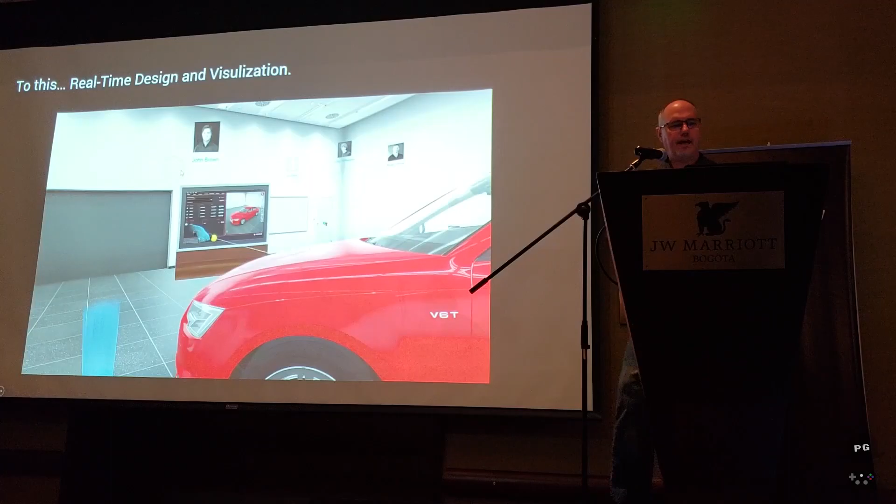I visited Audi in Germany a few months ago after Unite Berlin, and I saw this exact environment. There was a team of engineers actually designing the next generation of Audi vehicles like this. And this is what they see - you see the people here, and then you see their avatars. They're actually all in VR, making design decisions of these really cool cars.

This gentleman here is an engineer, an interior engineer. He's designing the interior. He wants to make sure that steering wheel feels right, that the seat feels right. I actually sat in that seat, and I was able to virtually grab the air conditioning ducts and see the particle stream, the way the particles of air would hit my face - is it high enough, is it low enough? You can make a lot of design decisions all in VR. It's really, really amazing what they're doing.

And this is what he sees. He's in the car, he feels like he's in the car. He's holding the real steering wheel, there's trackers on there, so it's all tracked. It's all perfectly to scale. It really feels right, it's amazing.

Anyway, if you look over on this side of the room. At Volkswagen, every 5, 6, or 7 years they completely build the next generation of cars. That costs about $1 billion to do. Every time you see the all-new Ford, whatever, that's a lot of money, a lot of investment.

They have to retool the entire assembly line. In virtual reality, they're now able to completely design the assembly line and walk workers through how to build a car before they ever build that assembly line. The assembly line in Germany that I visited at Volkswagen is 3 kilometers long, one assembly line, and they have it all in VR. It's incredible what they're doing. They're actually able to train their employees to build those cars before one nut or bolt is ever turned.

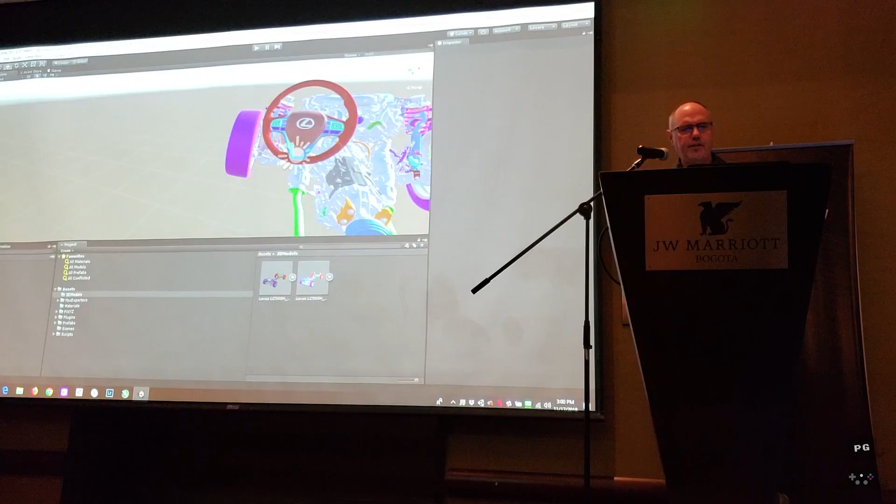If we take a look at the steering wheel, or the steering column, let's frame up on this. When we're game developers, we model just the things that people see. But when you're dealing with engineers, you have to model the airbag assembly. If we take a look at the Lexus logo, every single fastener that attaches the logo to the steering wheel has to be in the model. This isn't a design model, this is an engineering model, a very, very big difference between the two.

If you're making Forza racing, you don't care what the pistons are doing unless you're going to fly in there. But when you're doing engineering, you do. Look at this, that's geometry. Why would anyone model that in gaming? You wouldn't, right? But if you're engineering this, if it has to be created through a CNC machine or some type of lathe or whatever's going to make this, that has to be geometry. So all this crazy stuff, look at that, geometry, geometry.

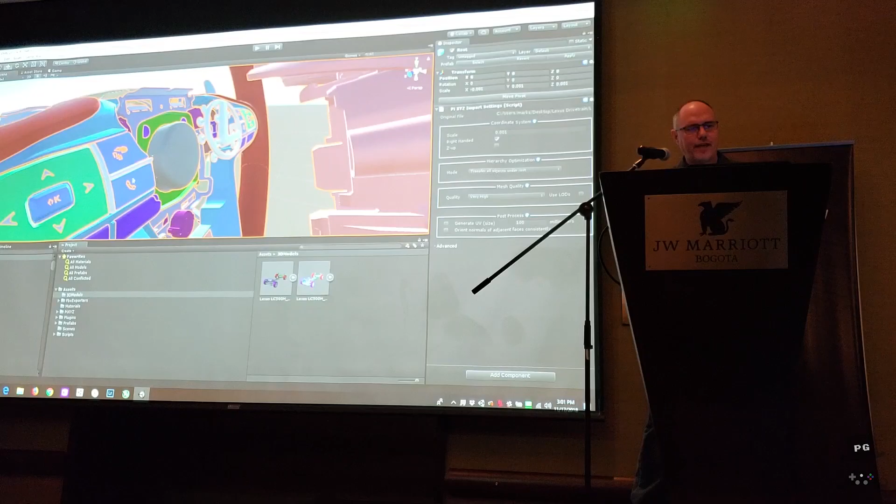If I expand the prefab that it just created for me, I'm going to show you all 3,000 of those objects. This is what just converted for you live, in a minute and twenty seconds. That's crazy, this blows people's minds at these facilities. I show this to Ford and they're freaking out, how is that possible? Look at that, it just keeps going and going and going. It's incredible. So this is all through our collaboration with PiXYZ, and we're really, really happy about that.

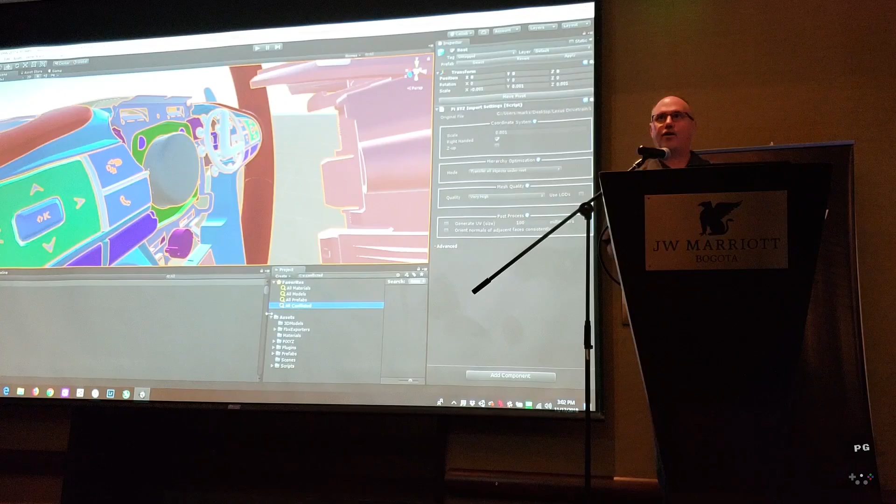One of the neat things this allows car manufacturers to do is, they use programs like CATIA, or SolidWorks, and those don't animate. They don't have virtual reality, they can't do particle effects, they can't do explosions. So once you get this data into Unity, we can take all the power of the Unity game engine and throw some of these really cool gaming effects at it.

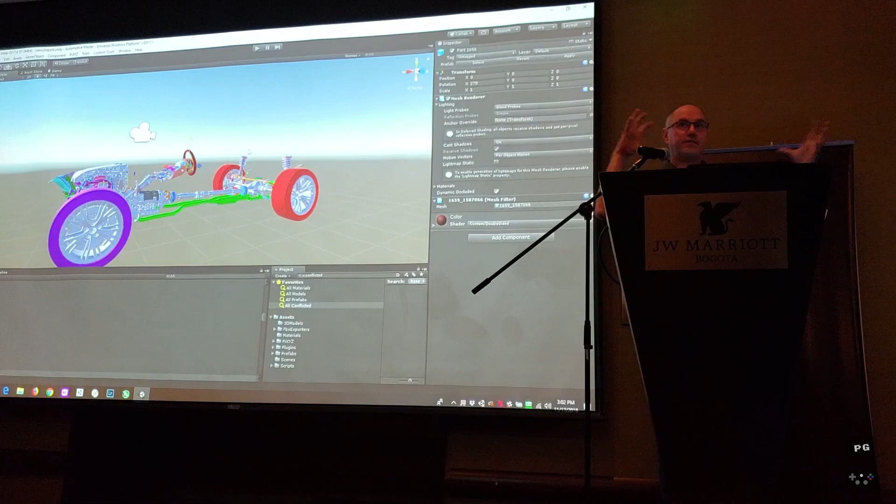One of the things that's super popular in this type of work is the exploded view. Not like when we think of exploding something by launching a missile at it, but the exploded view where you can see all of the parts inside, right? Well, we can just write a simple script for this. You can't do that in these other modelers.

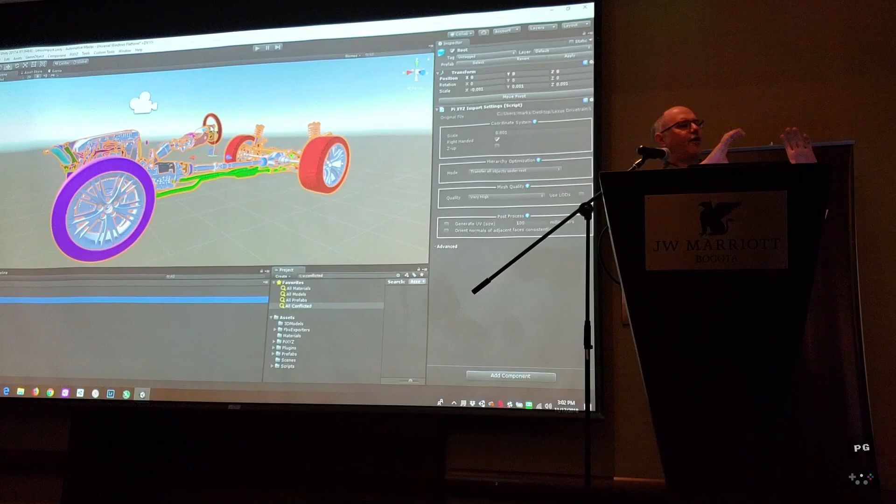So watch this, I've got a quick little script that's going to allow me to do the exploded view on this model. Now, one thing that's weird about CAD models is they put the pivot points in the weirdest places. So, you have a tire, and normally you'd want it at the center so it rotates there, but no, it'll be way over there. Pivots are just always in a very random place, it seems.

It's not random, but it doesn't make a lot of sense for a game developer. So for me to get this script to execute correctly, I need to tell all the pivot points of all 3,000 objects to be located at the dead center of the world.

So I got a quick little script to do that. You don't see anything happen, it's all automatic. I just click on Custom Tools, Adjust Hierarchy, and that resets my pivots. So all 3,000 objects are approximately all now in the dead center of the world.

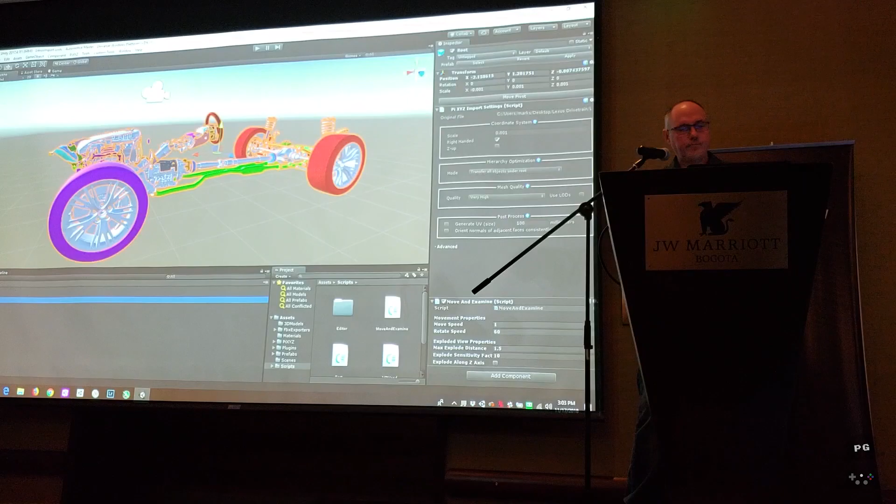I'm going to take one other script. It's on here, it's called Move and Examine. I'm just going to drag and drop that on here. Mike Guy, who spoke earlier, wrote this awesome script for me. It's really not a whole lot of code, but what it does is it basically builds a bounding box for the size of my model. So this will work on everything from a 777 jet down to a little tiny assembly. It figures out how big this CAD model is, makes a bounding box, and puts the expansion point right at the dead center of that as well.

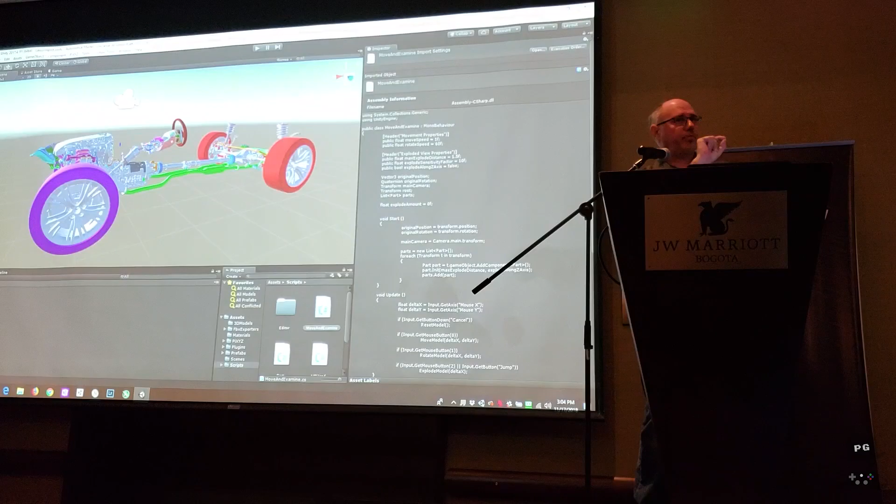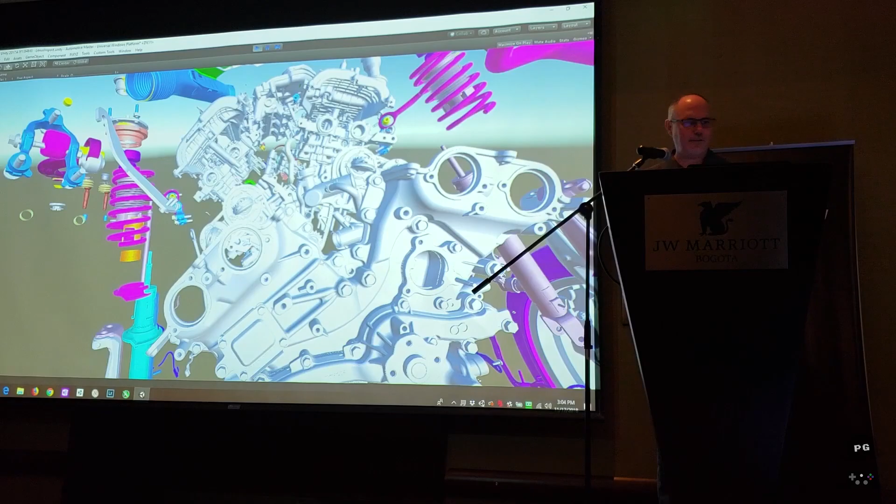So from here, if I press play, and now I'm in game mode, play mode, if I use my middle mouse button, I can now do the exploded view. Right? This freaks people out. Like you guys are saying, ooh, wow. But you're used to this kind of stuff, right? You're game developers. People that model engines, they're not used to this. This freaks them out. Like, holy shoot, I can do that.

Don't mind me. Look, it even says like Toyota on there. See that? Like the little Toyota emblem on there? But if we get there, it is Toyota. All geometry. We can just fly in there, fly around. Look, inside the transmission, why would you put the bolts there? You have to put the bolts there with this. So really, really cool that we can do this.

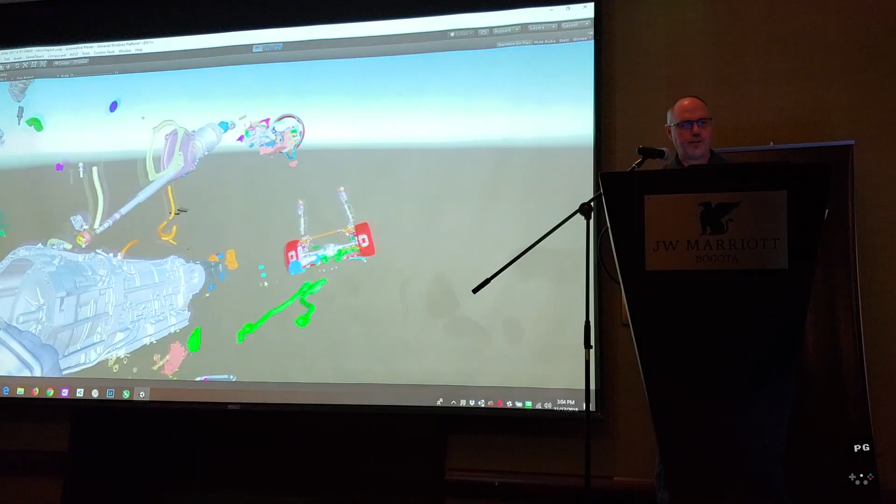Again, this mind-boggling stuff, so I'd love to show you more. I'd love to show you this in VR, but I only have 20 minutes today, so we're not going to do a whole lot. Sometimes I animate this with a timeline, or I'll start throwing materials on it. But rather than throw materials on this model, I'm going to get rid of this. Sometimes this takes about 30 seconds to exit, so I'm going to do this just to save some time. And let's just launch another one. I thought my talk was 40 minutes, so I'm really condensing it.

So we're going to show you one other cool thing, the material library. Let's do this one first. Because we started supporting this automotive team, we thought it would be really great if we had a library of materials to show off automotive type objects. So if you guys were walking in, I was flying around that Lexus, all those really nice materials that were on there, those were all created with the workflow that I'm going to show you here in just a second. So what we've done is we've created a library of about 150 unique objects or unique materials that just pertain to automotive or industrial uses.

So leathers, wood grains, a lot of neat plastics, a custom car paint shader. It takes a second to load up because there's about 150 different materials, all with different texture maps. And we actually have a process of making those, which we're going to release to you very, very soon.

So if I back out here, where am I in this scene? Oh, what? Whoa, upside down. Wow. All right. Come on, Mark, get this straight. All right, so this is the exterior of that Lexus. And if we fly a little bit closer, why is this not? Stall. Hold on. Come on. There we go. All right.